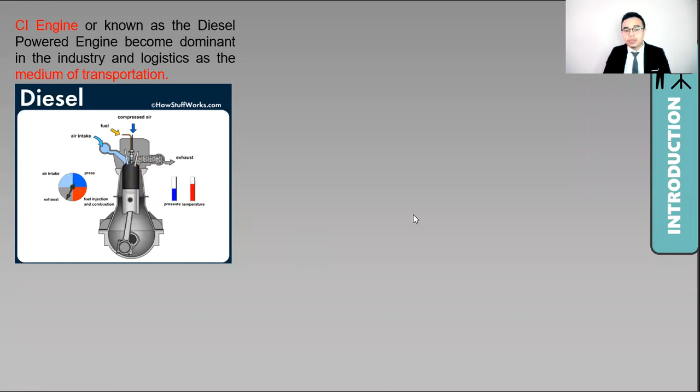the compressed air is mixed with the diesel fuel in the engine block to produce the performance of the engine. At the higher pressure and higher temperature in the engine block, the physical properties of the diesel fuel in terms of its density and viscosity become the most crucial concern in order to provide a proper injection of the amount of fuel to the engine by the fuel injection system.

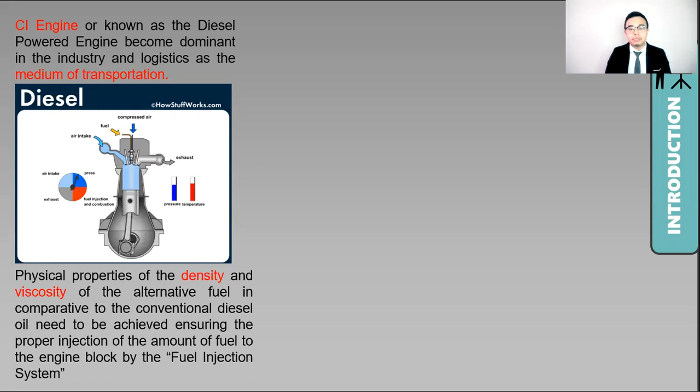A high viscosity fuel may result in poor atomization characteristics and a narrow spray angle by the injector, which may also harm the injector system of the engine. So in this study, I am proposing waste cooking oil to be used as the alternative fuel, and due to the volatile crude oil price, many researches have been done to run the engines in other ways, like hybrid and also biodiesel.

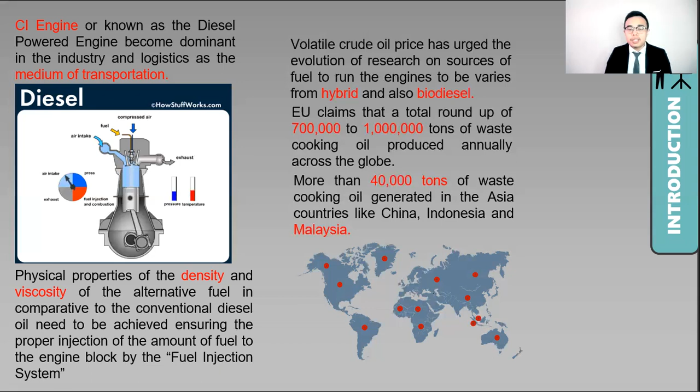The European Union once claimed that almost 1 million tons of waste cooking oil are produced annually across the globe. And shockingly, 40,000 tons of waste cooking oil are generated in Asian countries like China, Indonesia, and also Malaysia, where abundant accessibility can be obtained in the food and beverage industry. So the utilization of waste cooking oil has been discovered since decades ago.

However, those experimental setups and studies are more focused on the accurate proportion ratio of the waste cooking oil in order to form biodiesel. And also a complicated process is involved, like trans-esterification, in order to treat the quality of the waste cooking oil.

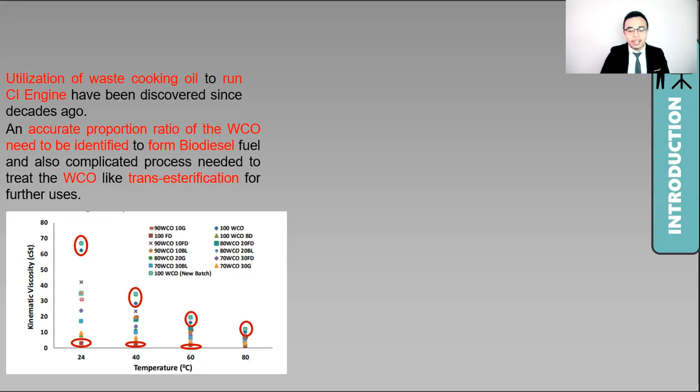Due to that particular property, in this study I'm using a heat recovery device in order to elevate the temperature of the waste cooking oil at the highest rate, to reduce its viscosity and density. The idea is that at the elevated temperature, the kinetic energy of particles in the fluid can weaken the intermolecular forces, resulting in a lower density and a lower viscosity of the fluid itself.

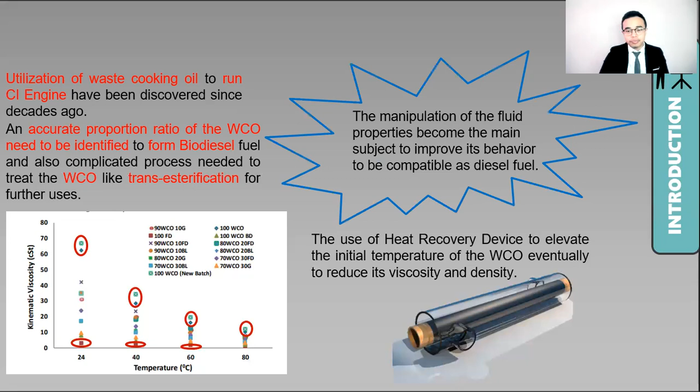So in this study, I am manipulating the fluid properties, using the temperature variable to improve the behavior in order to be compatible as diesel fuel. For the application, the heat recovery device plays the same role as a heat exchanger, transferring heat between the working fluids through conduction in the device's material. The HRD is designed with counterflow orientation to provide a better uniform temperature difference.

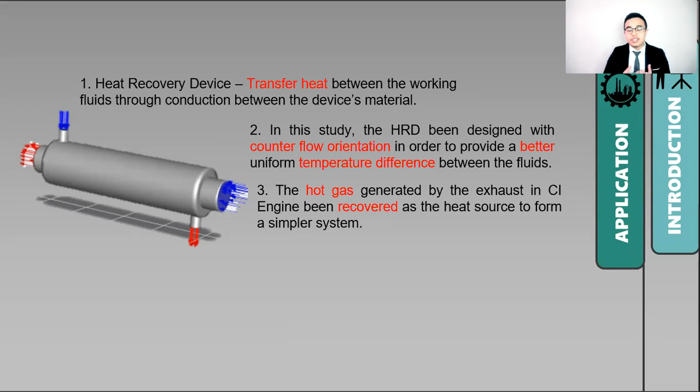And the benefit of my study is that I am using the recovered exhaust gas generated by the CI engine to supply the heat source for the system, in order to form a simpler system, and a lower development cost is required. The deployment of constant area rod fins is also introduced in order to maximize the extended surface area. The idea will be explained more later.

The HRD is able to elevate the temperature of waste cooking oil at the highest rate in order to preheat it, improving the fluid properties so it is ready to be channeled to the engine for combustion.

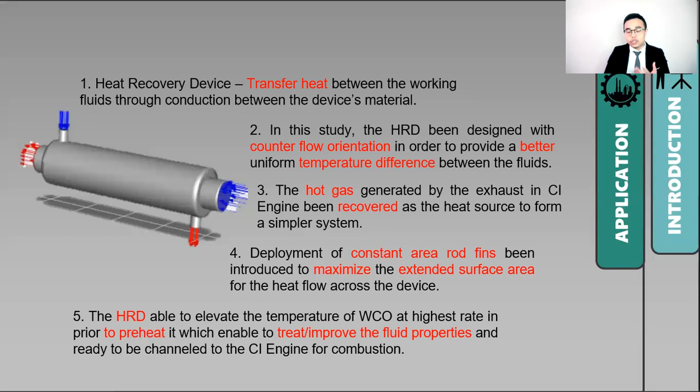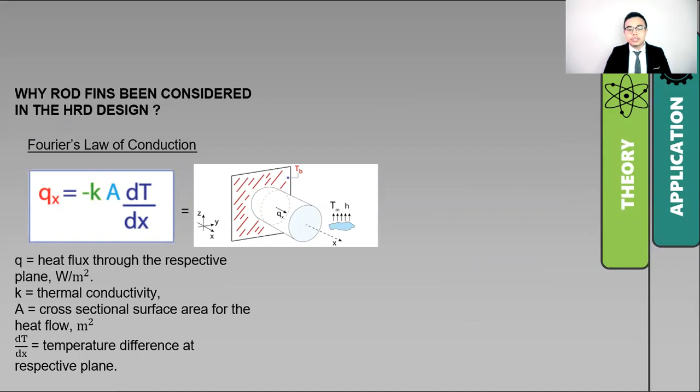So what is the theory behind the rod fins deployment in the heat recovery device design? I'm looking at Fourier's law of conduction, whereby the heat flux is dependent on the thermal conductivity of the material, the surface area for the heat flow, and the temperature difference at the respective plane being observed.

When we look at the equation, there are three major variables. In order to control the thermal conductivity, it's assumed to require a higher cost for material selection and development. So by applying engineering theory, engineering analogy, and engineering practice in designing the device, we can extend the surface area by deploying rod fins to provide a larger surface area for the heat to flow, resulting in a higher heat flux.

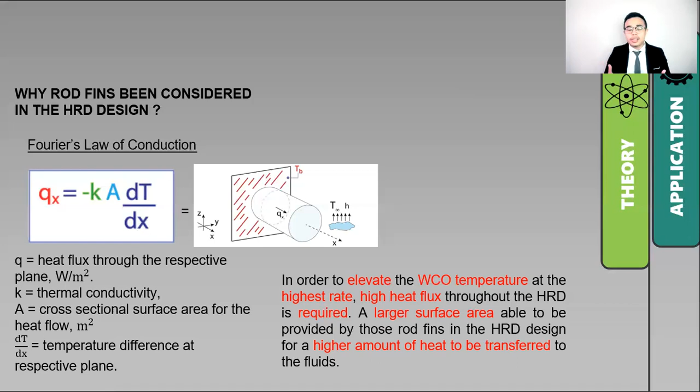So why do we require a higher heat flux? This will be explained by a simple general equation, whereby a higher heat flux may generate a higher heat transfer coefficient in the system, and eventually also generate a higher temperature difference, which can elevate the WCO temperature at the highest rate, allowing a higher amount of heat to be transferred to the fluid.

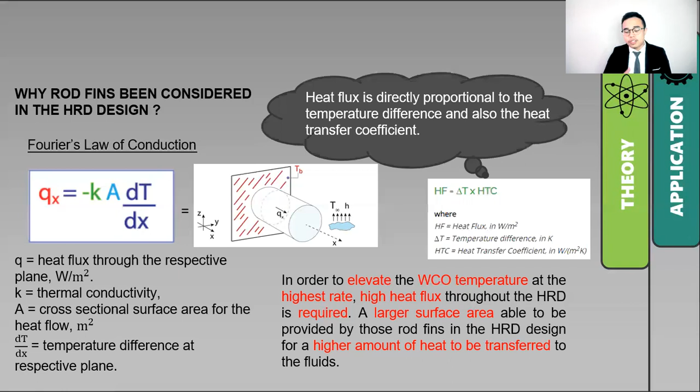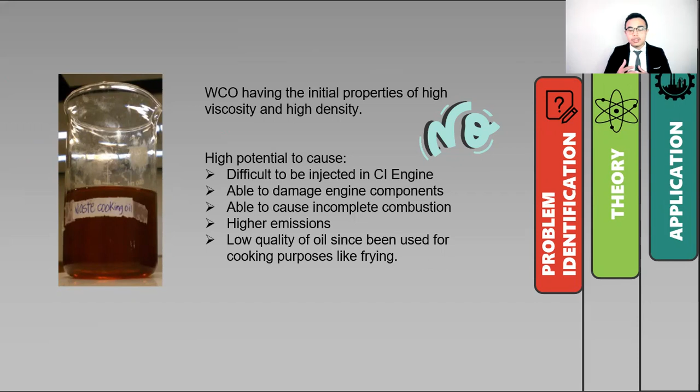So the objective of my study is to monitor the highest temperature of waste cooking oil at the outlet, while at the same time determining the ideal arrangement of rod fins in my HRD models.

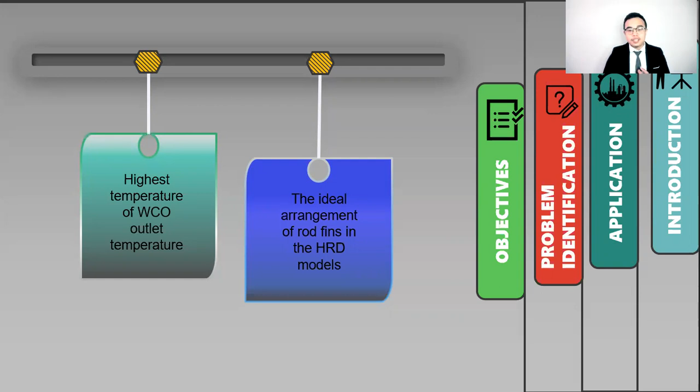Moving on to part 2, my methodology. In my research I'm using ANSYS software for the simulation, and due to the MCO, I am not able to carry out the experimental setup, which I really wanted to do.

However, I am proposing the simulation of 5 models with different arrangements of rod fins in the heat recovery device, and I am considering 3 major concerns: the outlet temperature of the WCO, the heat transfer coefficient generated, and the temperature distribution throughout each system.

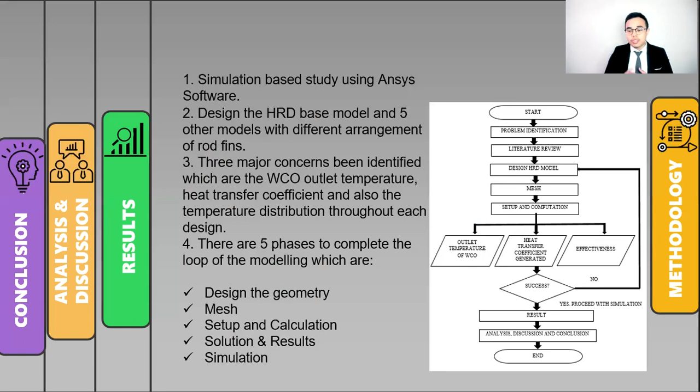Referring to the project flowchart shown below, I continue designing the same model in order to achieve a higher outlet temperature of WCO with each preceding model. If the temperature determined is at the highest rate, I can proceed with the simulation.

These are the steps of my methodology for the study, and these are the fixed geometrical dimensions of my heat recovery device model. As shown in the slide, this is the base model for the heat recovery device, whereby I'm also adapting the dimensions set up by my previous senior, Mr. Amir Hambali, in order to set a benchmark to compare result outcomes and ensure continuity of the study.

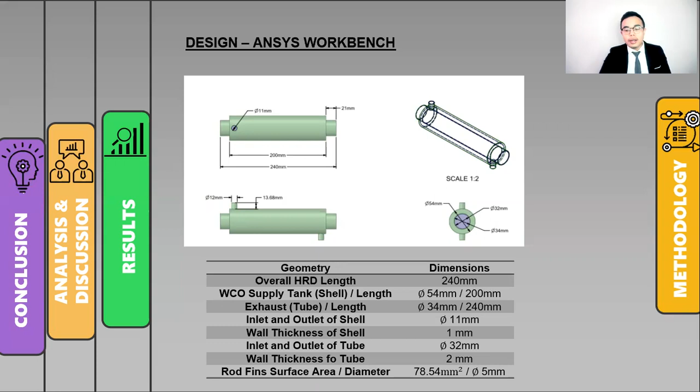These are the proposed design models. In Model 1, I am proposing the deployment of constant rod fins with a number of 16 and mutual spacing of 20 millimeters, with inline straight alignment. I observed an increment of 7.86% in the WCO outlet temperature compared to the base model.

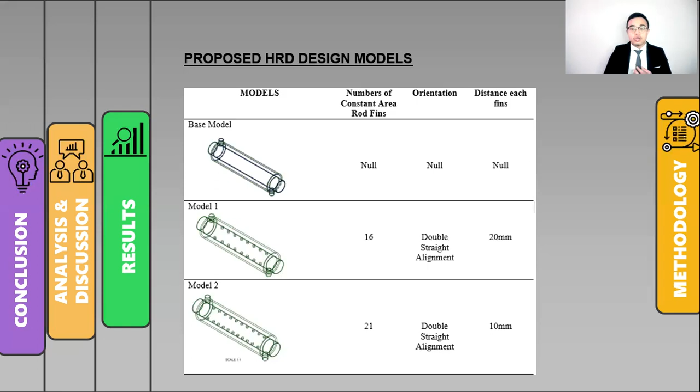I proceeded with the same orientation of inline alignment arrangement, but with a smaller mutual spacing of 10 millimeters and a higher density of constant rod fins with 21 of them. I observed an increment of another 11.91% in the WCO outlet temperature compared to the base model.

I improved my design by continuing to adapt the same orientation in Model 3, but with a 15 millimeter mutual spacing. I obtained a lower percentage gap compared to Model 2, with around a 0.02% difference.

I further improved my design through Model 4, with a lower density of rod fins, only 14 of them, and a larger mutual spacing, with the same orientation.

So I am observing that it is only 11.44% that the outlet temperature of waste cooking oil can be achieved.

So in model 5, I'm using another configuration, as I have found the relation between the mutual spacing and also the density of the rod fins in the preceding models. So I'm continuing in model 5 with the zigzag or staggered configuration, with a higher number of rod fins and also a smaller mutual spacing.

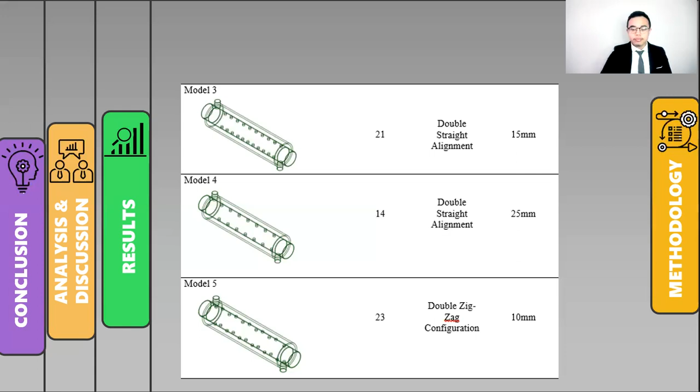So for the meshing, to observe the result outcome variations for each required variable and also to improve accuracy during the computation, as you can see in figure 1 and figure 2, the working fluid of the waste cooking oil has been meshed thoroughly at the wall, the surface, and also the inlet and outlet, in order to provide a more accurate computation.

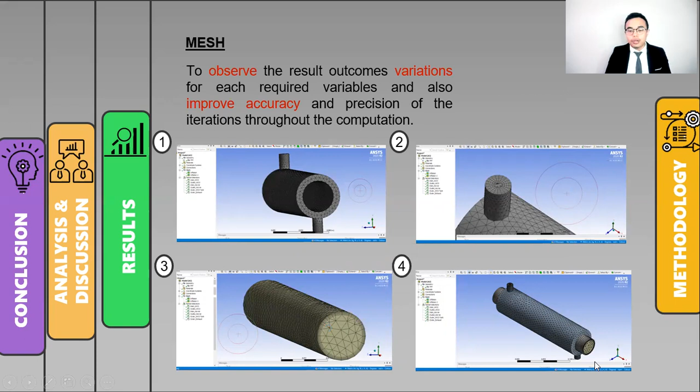And also the same goes to the hot CO2 gas that has been meshed at the surface and also in the inlet and outlet. So based on figure 4, the overall diagram of the proposed HRD models has been meshed.

So in meshing, I am improving some enhancement whereby I am adapting the inflation layer for the working fluids, as they are the major concern in this study. I define it as the inflation layer due to the respective boundary layer region for every wall-bounded flow, so more precise and accurate computation along the working fluid pathways can be generated through the computation phase.

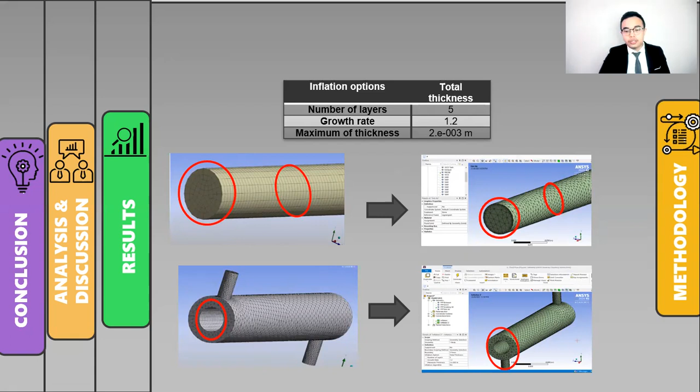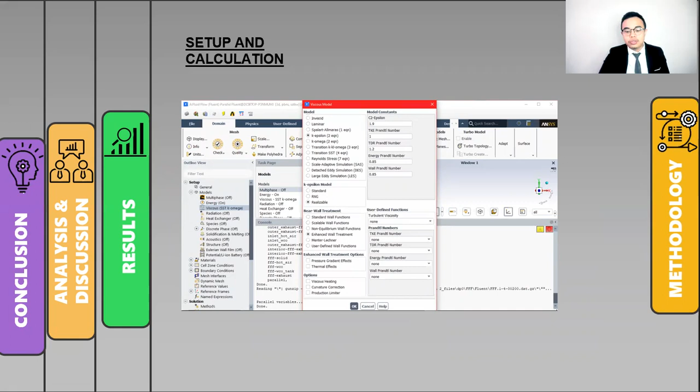For the setup and calculation, I am using the K epsilon realizable setting, and also the enhanced wall treatment, as compared to my previous senior study, to ensure the result outcome variations.

So for defining the properties, I am using diesel liquid that is available in the Fluent database. For the waste cooking oil, since the properties are unavailable, I am representing it as diesel. The carbon dioxide is somehow available, and for the copper, I am using it for the waste cooking oil pathways of the tank, due to its high thermal conductivity and also resistance to corrosion at high temperature.

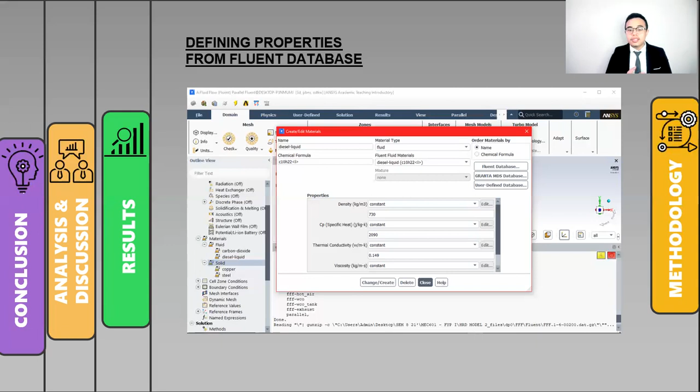And for the steel, I'm using it for my material of the exhaust due to its ability to resist high heat and its good appearance. Also, in the automobile industry nowadays, steel is the standard material selection for the exhaust, and it's proven for its performance.

These are the fluid properties that have been defined in the setup and computation. So many of them I referred to the standard values for the specific heat capacity of the CO2, specific heat capacity of diesel, the mass flow rate of CO2, and mass flow rate of the diesel.

These are the standard values, and also the 200 degrees Celsius of the CO2 supplied has been defined in line with the previous study, referring to the Handbook of Air Pollution 1998, from a diesel cycle engine with no load. Considered as the ideal cycle, the generated exhaust gas ranges from 200 degrees Celsius up to 300 degrees Celsius.

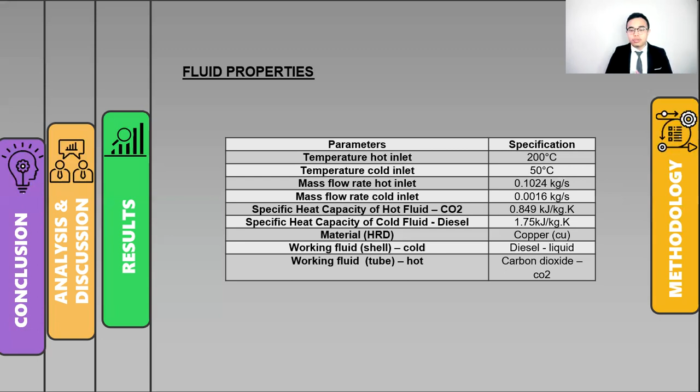So for the WCO, it is initially supplied at 50 degrees Celsius. So these are the boundary conditions of my HRD device model.

Whereby in the model, as shown in number 1, the waste cooking oil is supplied, and at number 2, it flows out from the system, with a minimum thickness of the tube in order to maximize the heat conduction and also to reduce heat loss to the surroundings.

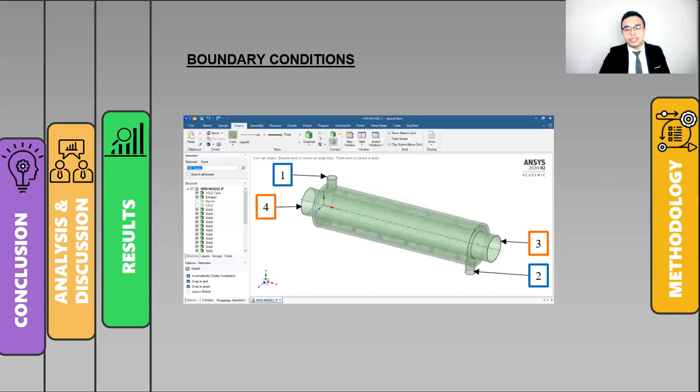And also, as shown in number 3, the hot CO2 generated by the exhaust is supplied at 200 degrees Celsius, and number 4, where the hot CO2 gas is released. Also, a larger diameter of the exhaust is designed in order to maximize the volume of fluid supplied to the system, in order to elevate the waste cooking oil temperature at the highest rate.

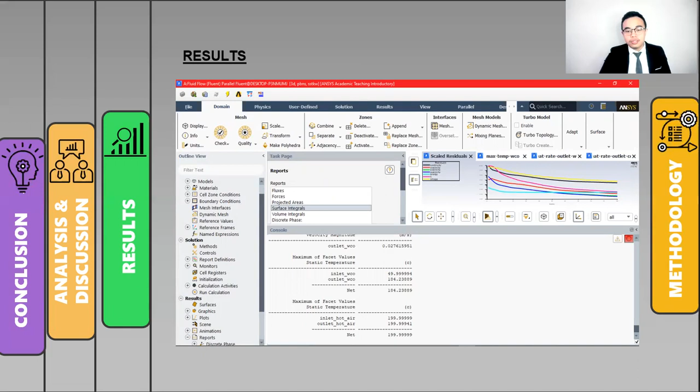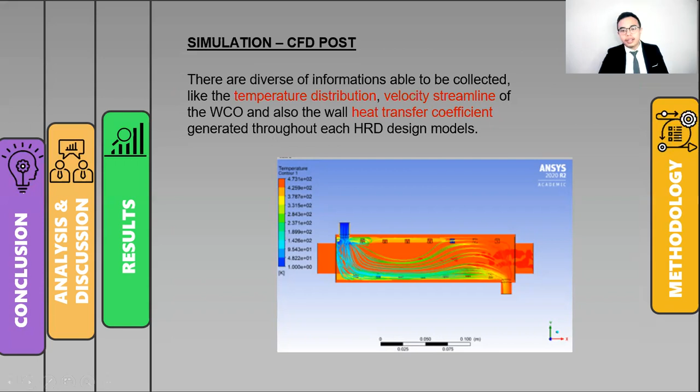So the results are represented through the surface integrals of the facet values as shown, and the simulation considers the temperature distribution, the velocity streamline, and also the wall heat transfer coefficient, as shown in the slide for every proposed HRD model.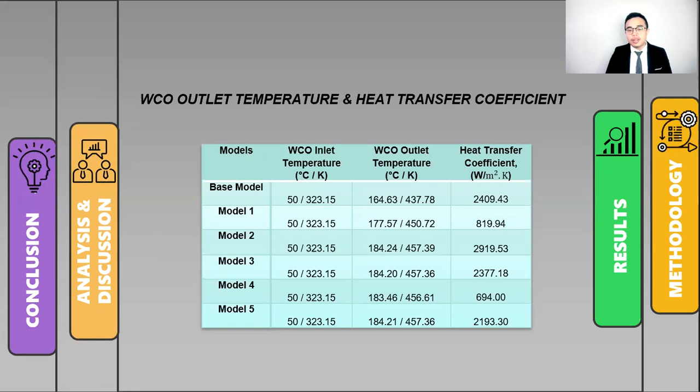So for the results, these are the major concerns: the outlet temperature of each design and the heat transfer coefficient. We can see that model 2 has the highest elevated temperature with 184.24 degrees Celsius and the highest heat transfer coefficient generated among the other models.

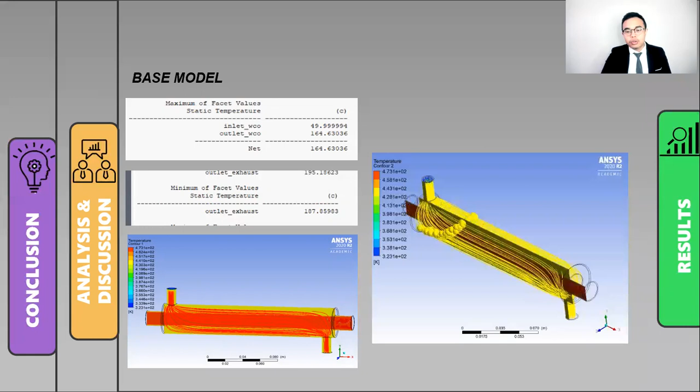This is the base model, which can only elevate up to 164.63 degrees Celsius, and a low temperature distribution can also be seen in the design, resulting in it only elevating at that range of temperature.

In model 1, the temperature is able to elevate up to 177.57 degrees Celsius, through the deployment of rod fins, and a better temperature distribution can also be observed.

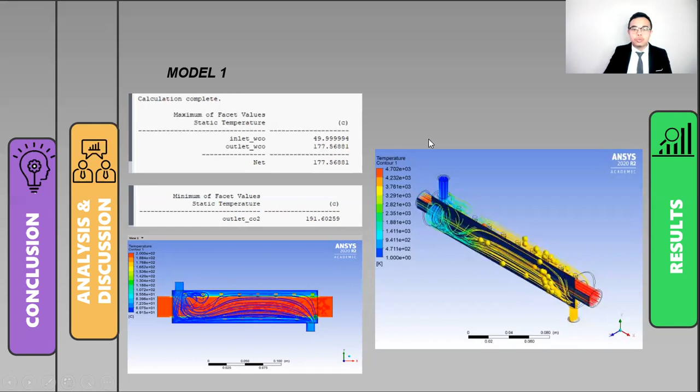Through model 2, which is the highest one, the waste cooking oil can achieve up to 184.24 degrees Celsius, and the temperature distribution of the design is somehow constant and more uniform, so it can resist for a prolonged duration of the system.

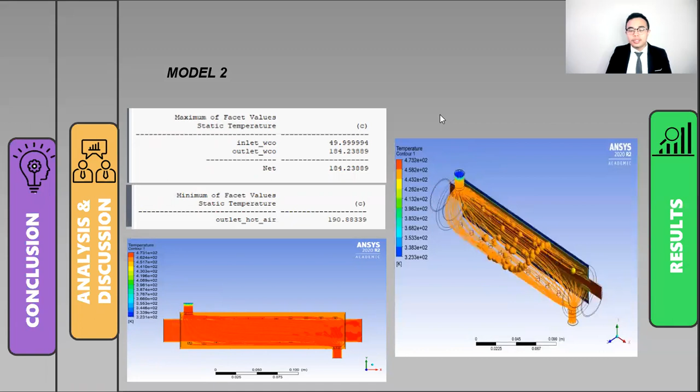This is model 3, which can also elevate up to 184.2, only compared to model 2.

Model 4 only reaches 183.46 degrees Celsius for the waste cooking oil, due to the lower rod fins and also the higher mutual spacing of each rod fin.

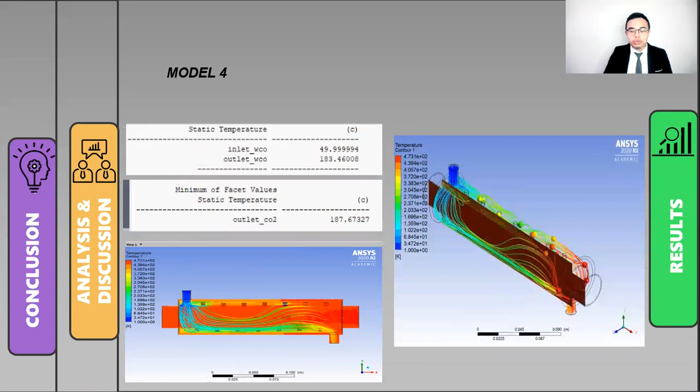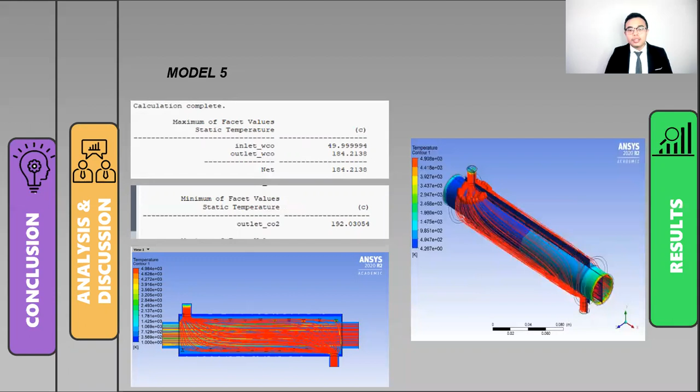And for model 5, it is able to elevate up to 184.21 only of the waste cooking oil outlet temperature.

For the findings, I constructed a distinction between the number of rod fins used in each design and the temperature of the waste cooking oil at the outlet. It can be seen that model 2 has the highest temperature elevation at 184.24, with a total number of rod fins of 21.

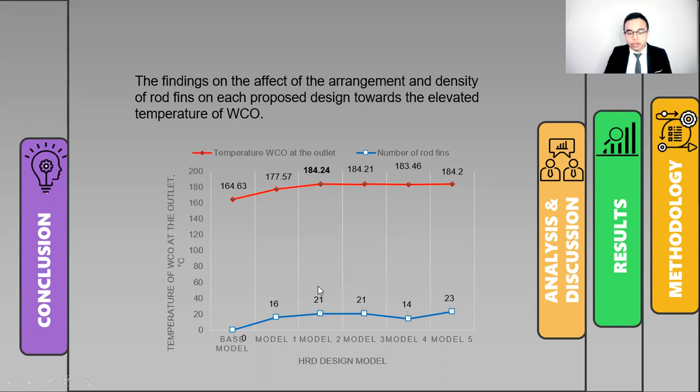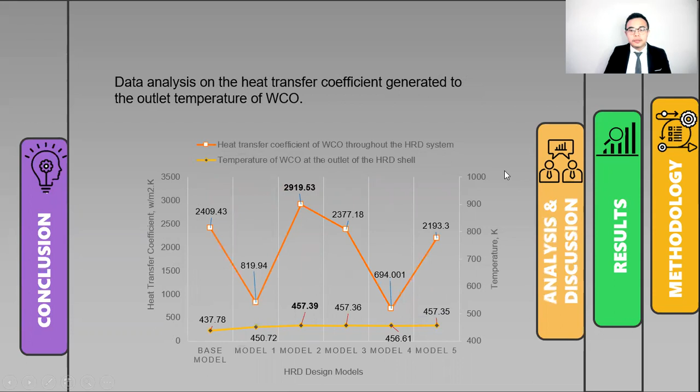Also, model 2 has the highest heat transfer coefficient generated, as can be seen through this graph. The effectiveness is further proven through the heat transfer calculation, with Qmax determined at 15.12 kilowatts.

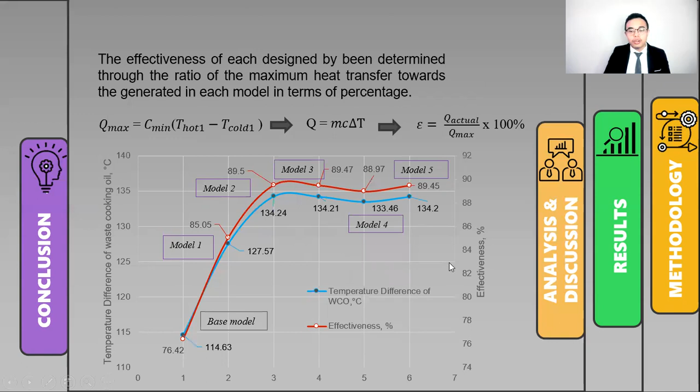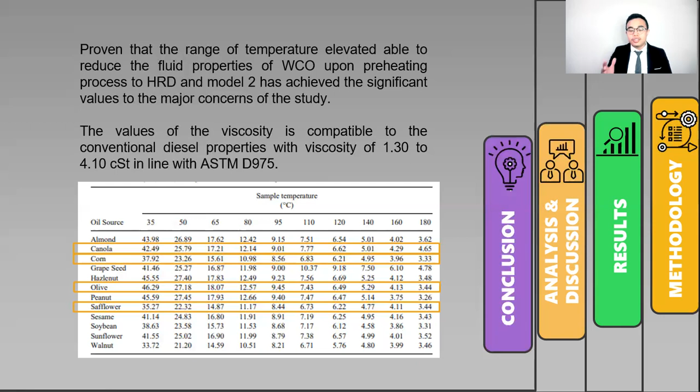So I can successfully say that my proposed models are able to elevate to this range of temperature in order to be compatible as diesel fuel.

For the conclusion, further on model 2, I have proven that the inline alignment of the constant area rod fins in the heat recovery device design is able to reduce the capital investment cost, save on irresponsible waste management, and adapt applicable engineering concepts in order to minimize dependence on natural resources.

We also managed to figure out an alternative solution to manipulate the conventional dependence on crude oil. This heat recovery device is also able to reduce operational cost, and serve as a wake-up call practice.

To save the environment, and in line with Sustainable Development Goal 13 on climate action, by providing recycling energy generated in industry especially, a cyclic sustainability program can be adapted.